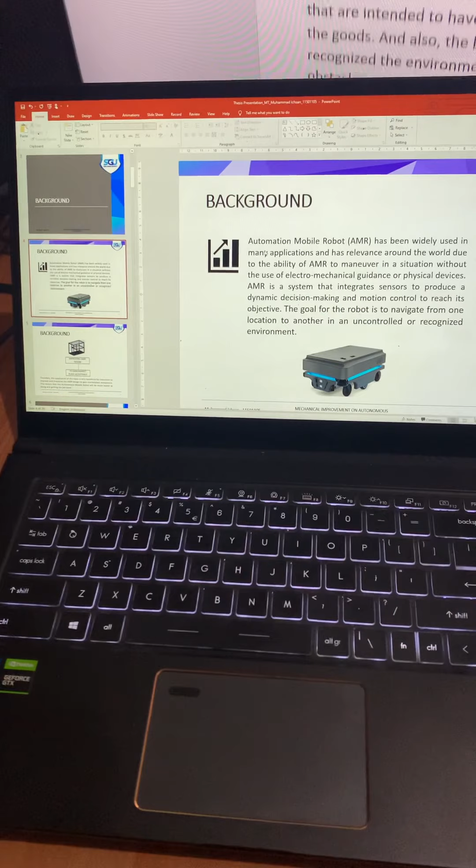So first, the background. As we already know, there's already AMR. So many AMR were made out there. Even there are some companies working on the making and the research about it.

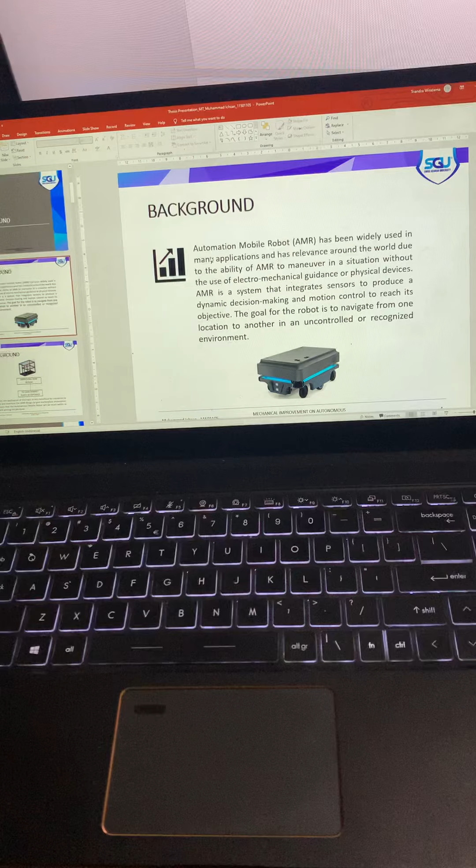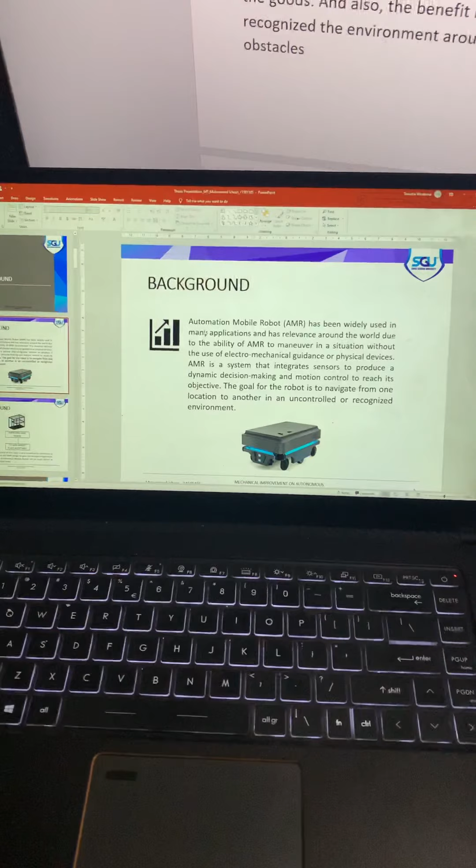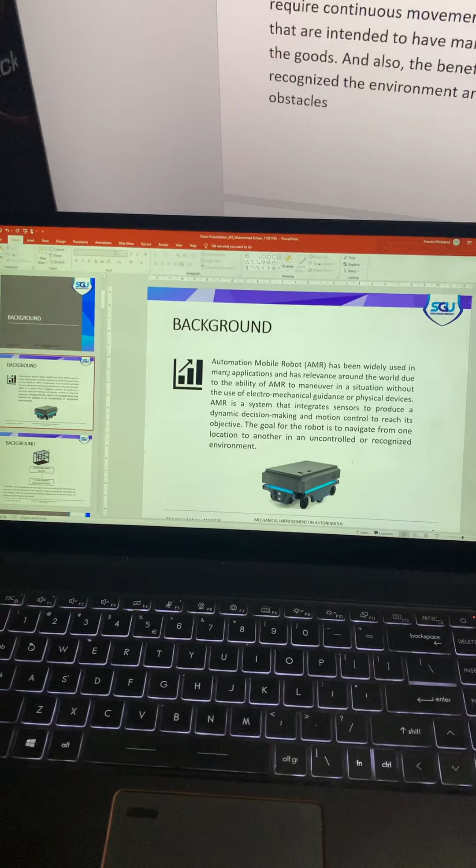The AMR robot itself was made with the aim of making it easier for jobs that require continuous movement of place, usually used in large warehouses that are intended to have many slots for placing goods and to move around the goods. Also, the benefit of this robot is it has sensors that can recognize the environment around the robot, and the robot itself can maneuver to avoid obstacles.

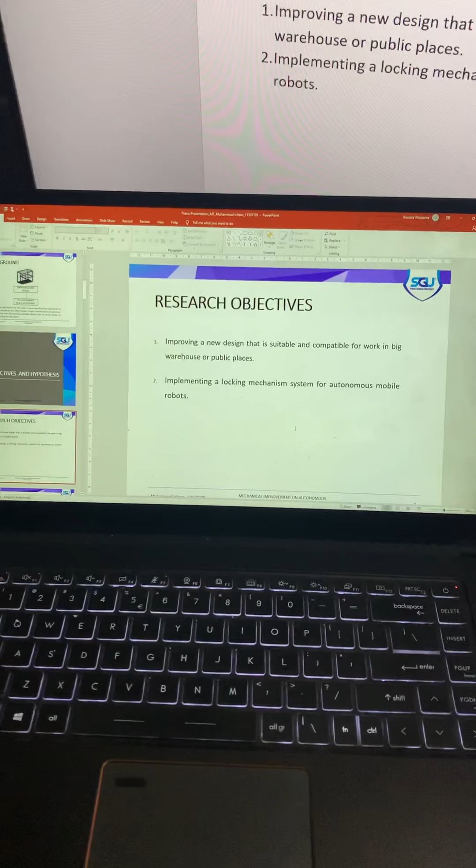The objective and the hypothesis. For this thesis, the objectives are: improving a new design that is suitable and compatible for work in a big warehouse or public place. Secondly, implementing the locking system for the autonomous mobile robot.

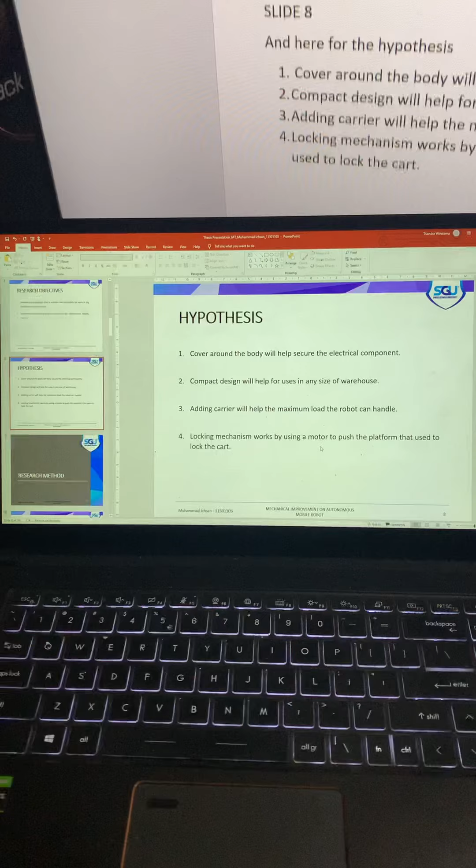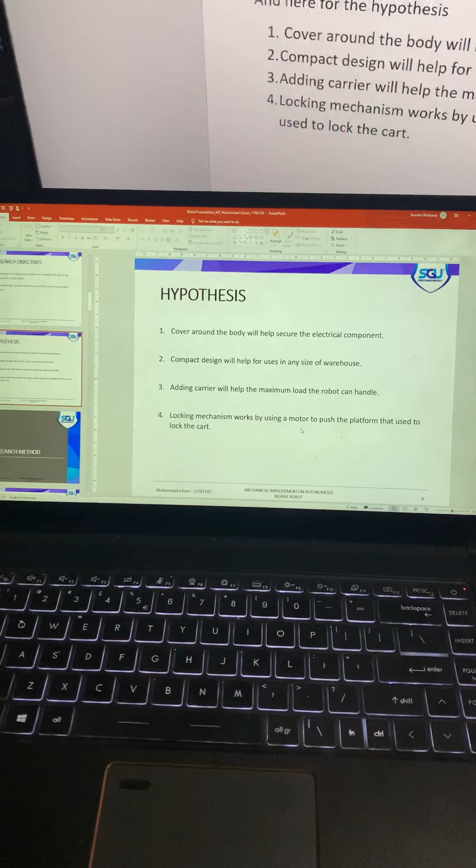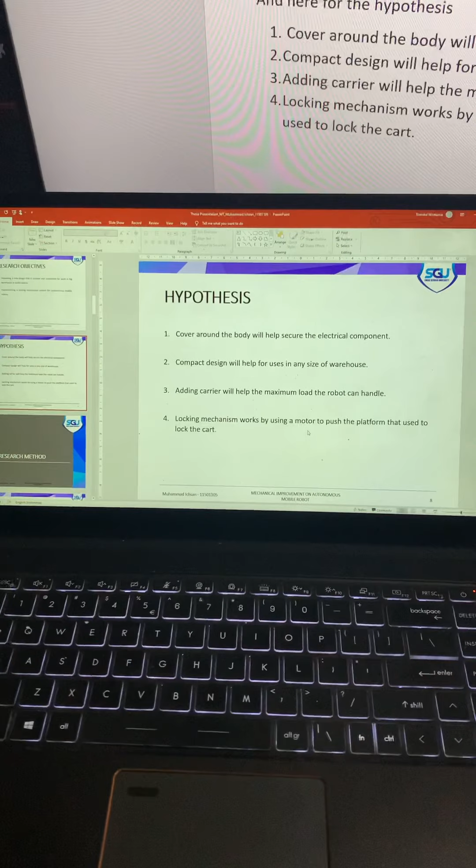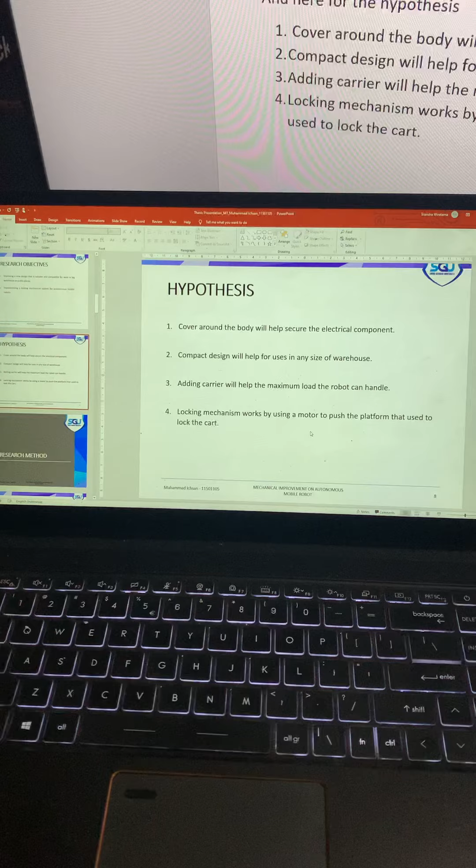The hypothesis of this work: first, the cover around the body of the robot will help secure the electrical components inside. Second, compact design will help for use in any size of warehouse. Third, adding a cart carrier will help the maximum load the robot can handle. Fourth, the locking mechanism works by using a motor to push the platform that is used to lock the cart.

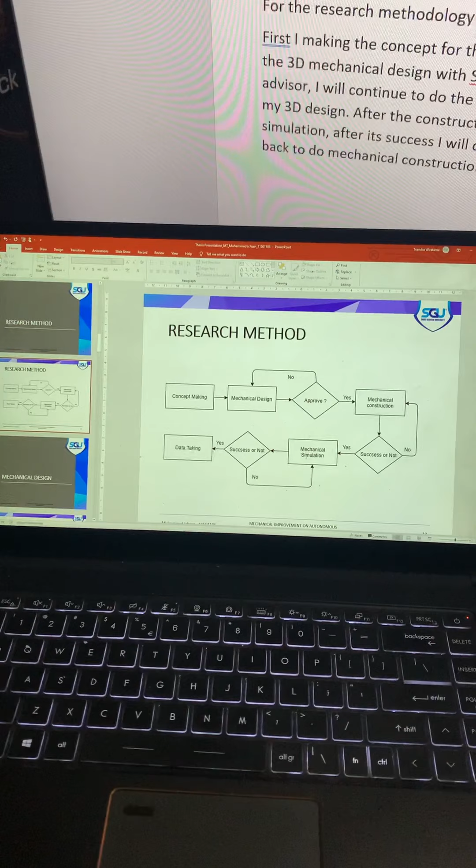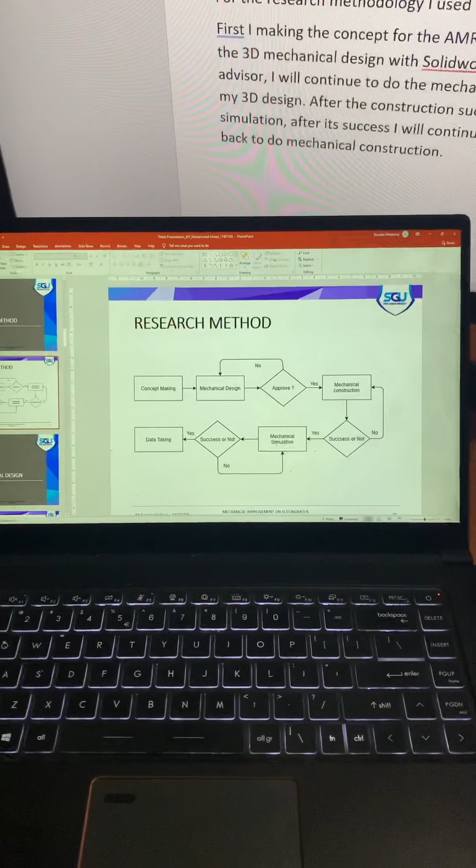Research method. So for the research methodology I use, the first thing to do is make the concept for the AMR design, choose the concept I want, then I will start designing the 3D design of the new AMR with SolidWorks.

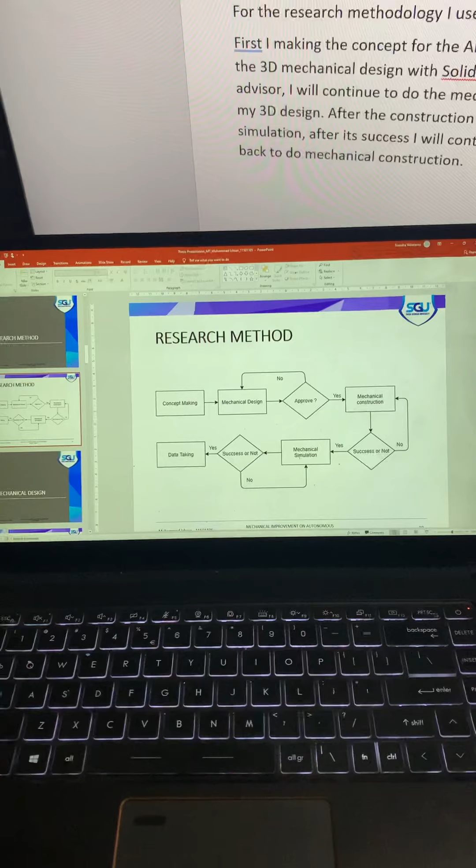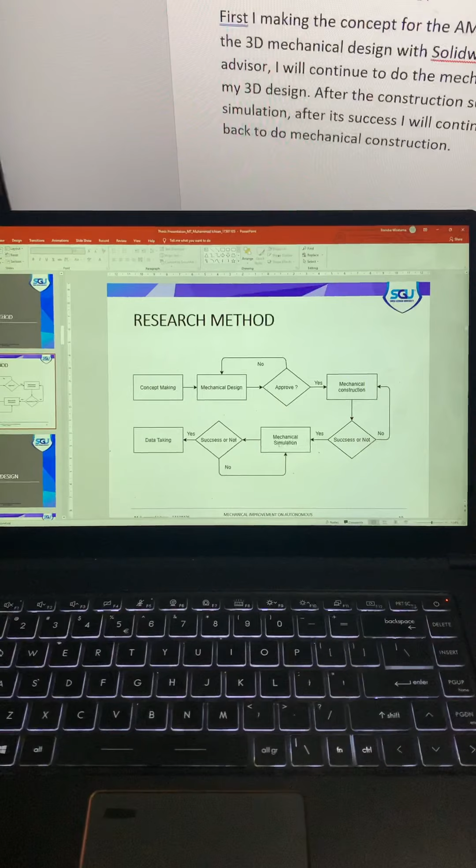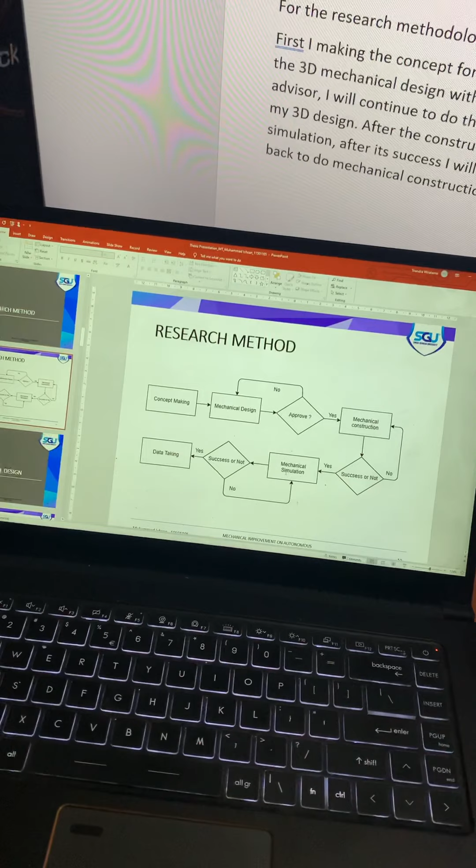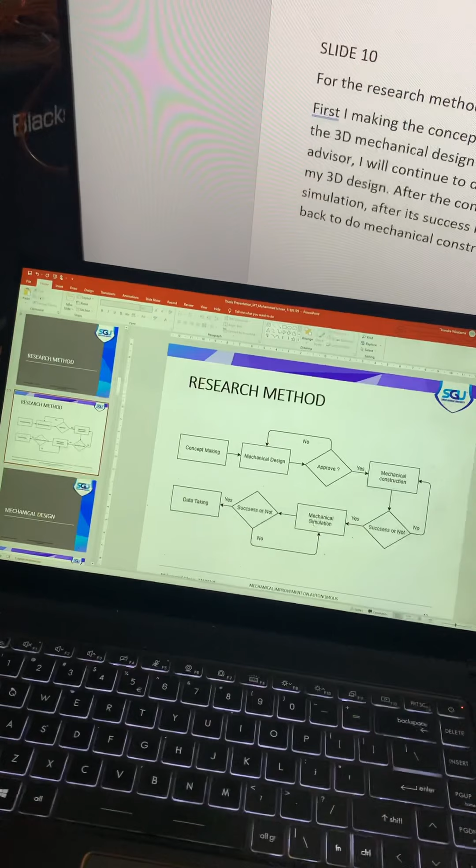Then after I get approved by my advisor, I will continue to do the mechanical construction. If it's not approved yet, I will revise the 3D design, and after the mechanical construction is successful, I will start to do the mechanical simulation. If there's still something wrong in the simulation, I will go back to the construction, and after it's all finished, I will start taking the data.

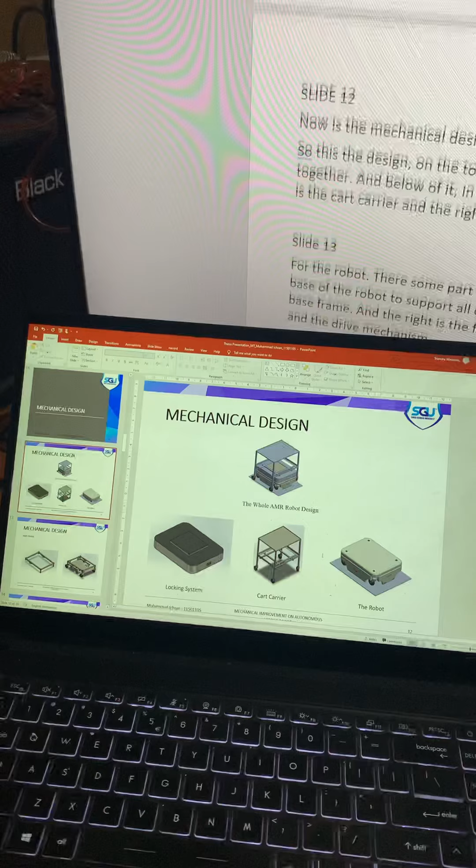So now is the mechanical design. The mechanical design that I already made by SolidWorks. So this is the design. As we can see, on top of the picture is the whole robot AMR design that I made.

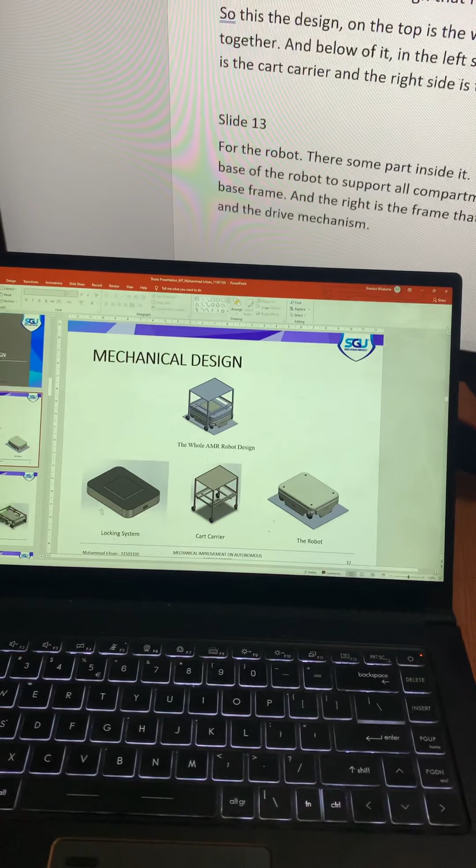The left side is the locking system that will be used for locking the cart carrier later, and in the middle is the cart carrier, and the right side is the AMR robot itself.

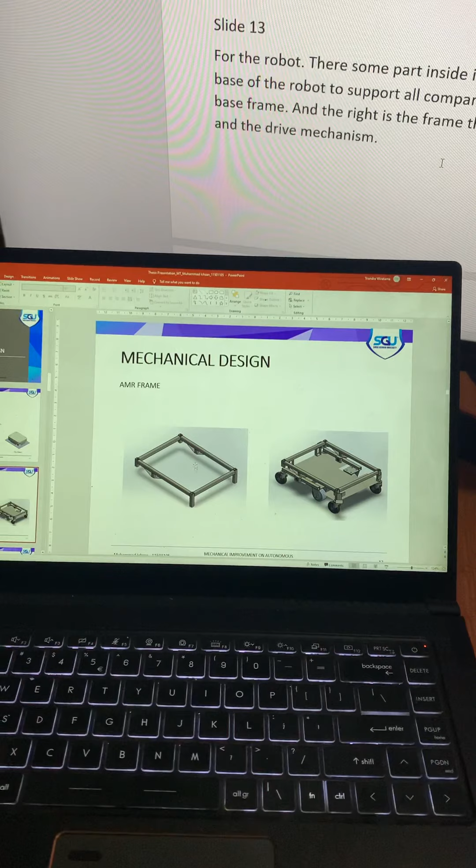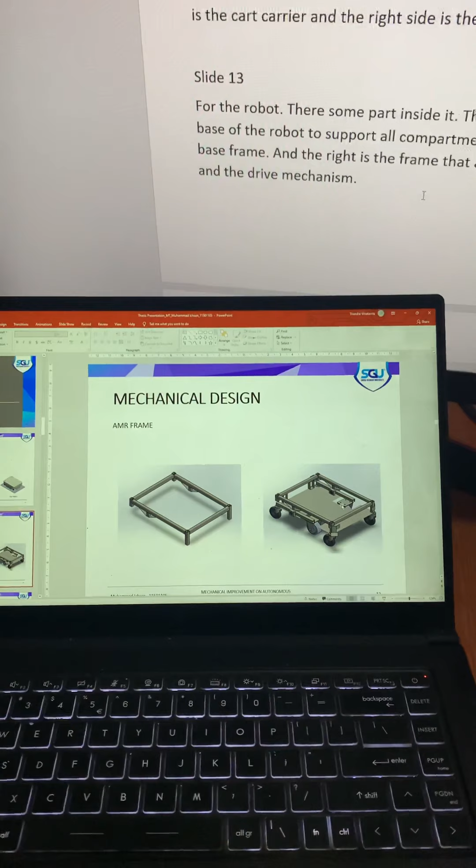For the robot itself, there are some parts inside of it. The robot has a frame. This frame is made as the base of the robot to support all the components later on. The left side is the base frame, and the right side is the frame with some of the drive mechanisms and other mounts already attached.

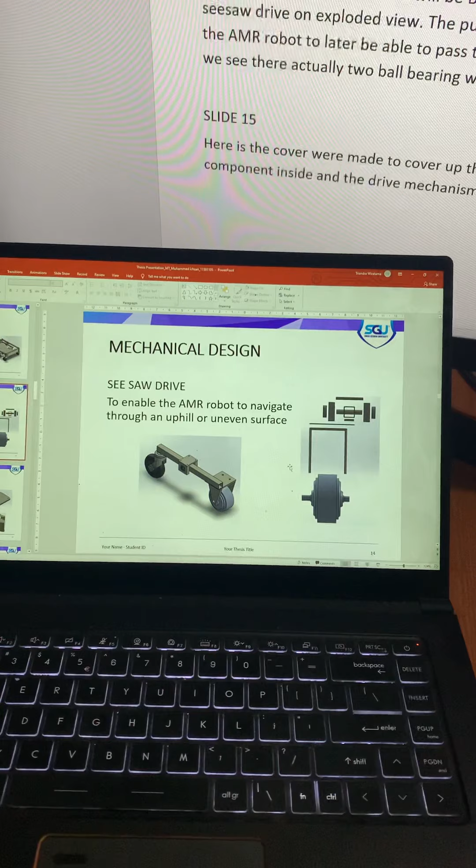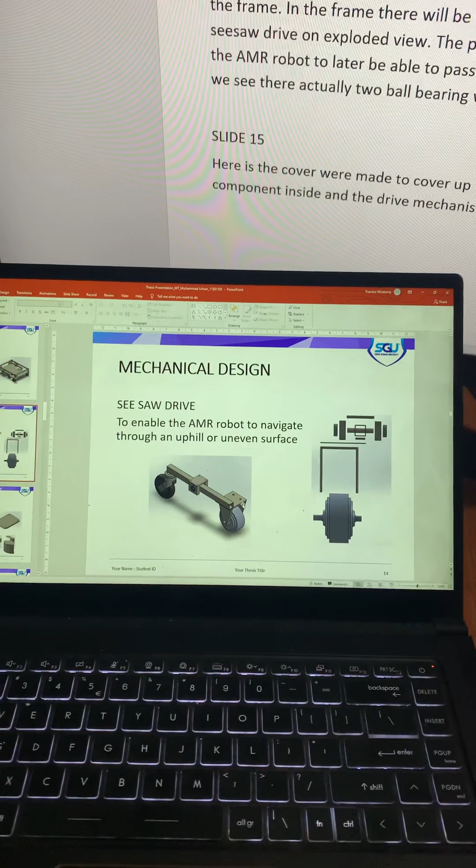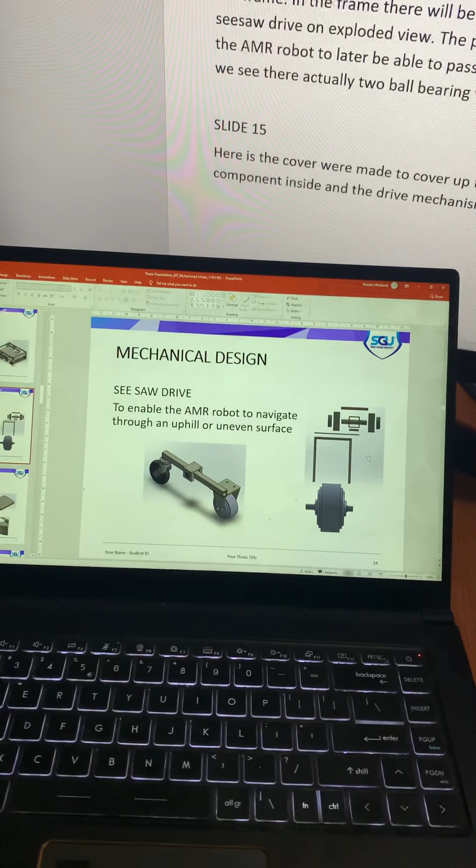Next is the seesaw drive, that will be used as the main base to support the frame. In the frame there will be a BLDC motor attached, as we can see here. This is the seesaw drive in exploded view. The purpose of this seesaw drive is to allow the AMR robot to later be able to pass through an uphill or bumpy surface. As we see, there are actually two ball bearings connected to the shaft.

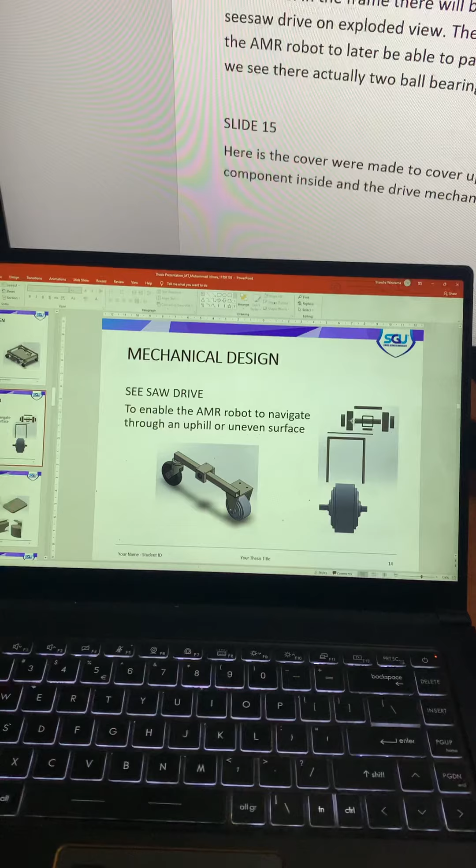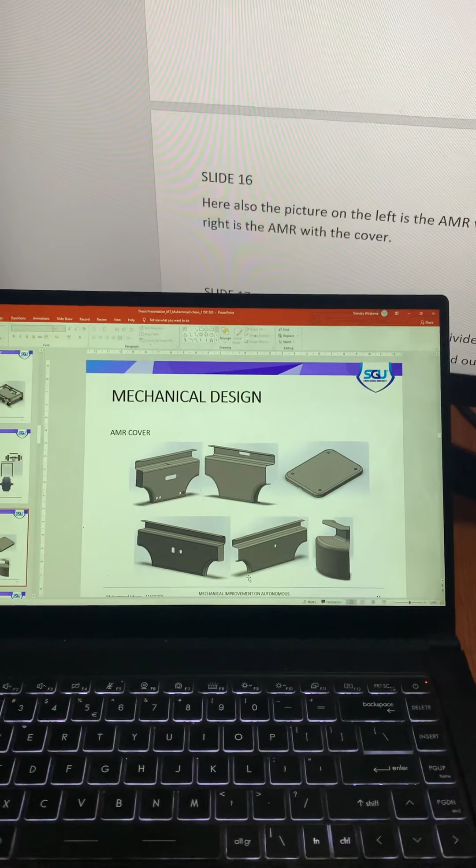Next, this is some of the cover of the robot that was made. The function of this cover is actually just to protect and cover the inside of the AMR robot, so the electrical components inside and the drive mechanism will always be protected.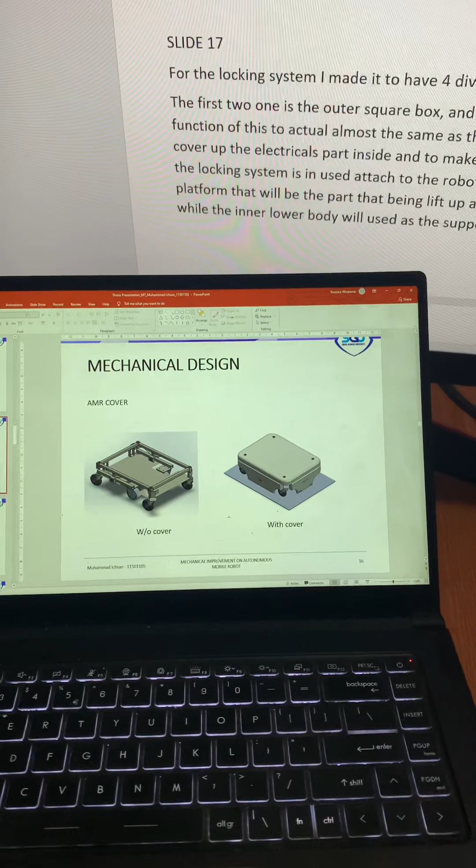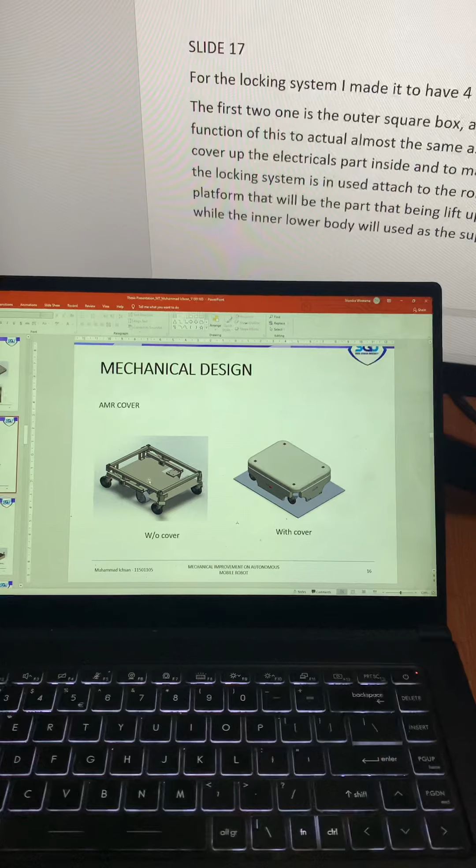So here, the left side is the AMR picture when all the covers are not included, and the right side is the AMR with cover.

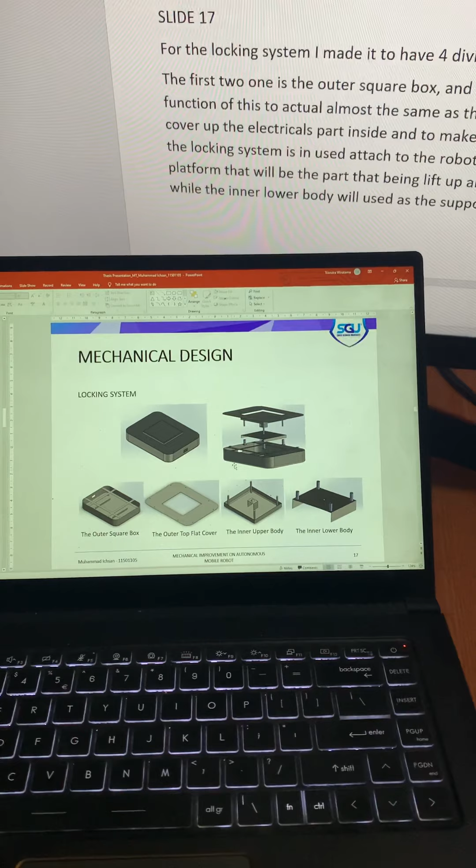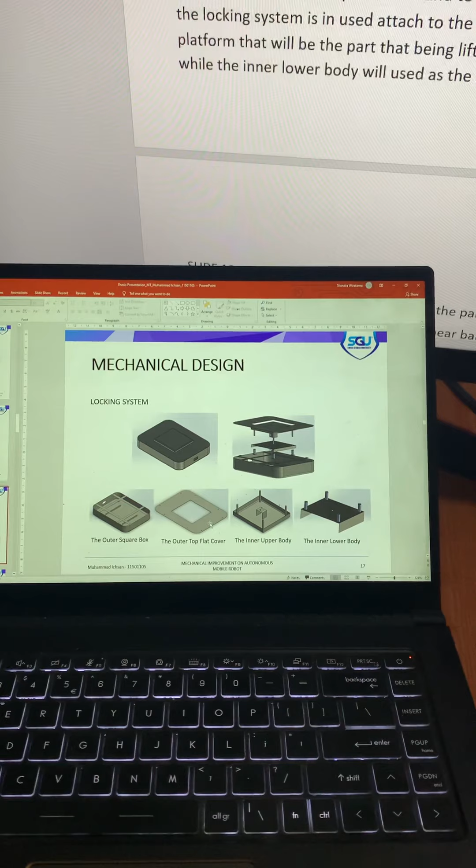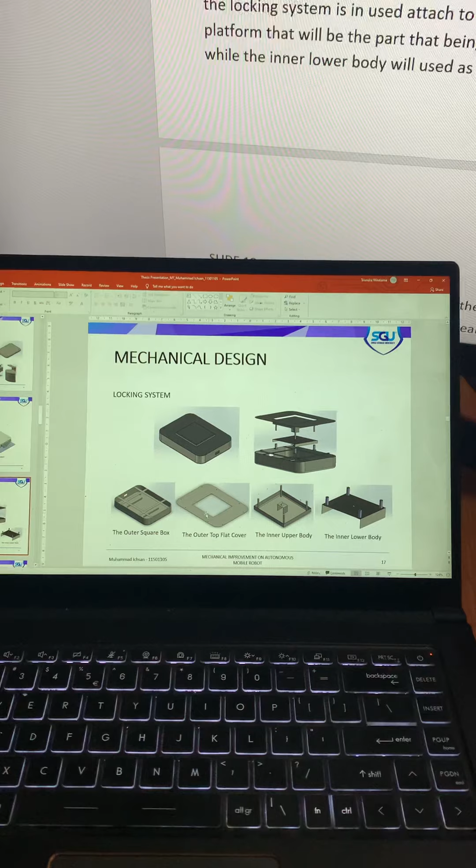And then for the locking system, I made this, the finished design, and here's the exploded view. Here I divided it into parts. The first one is the outer part, the outer square box, and the flat top cover. The function of these two is actually almost the same as the cover on the AMR robot, to cover up the inside part like the electrical part inside, and to make it as clean as possible when the locking system is used to attach to the robot.

Here is the inner upper body, the inside of the square box. The inner upper body is the platform that will be lifted up and down by the stepper motor, which will attach here, while the inner lower body will serve as the support for the inner upper body.

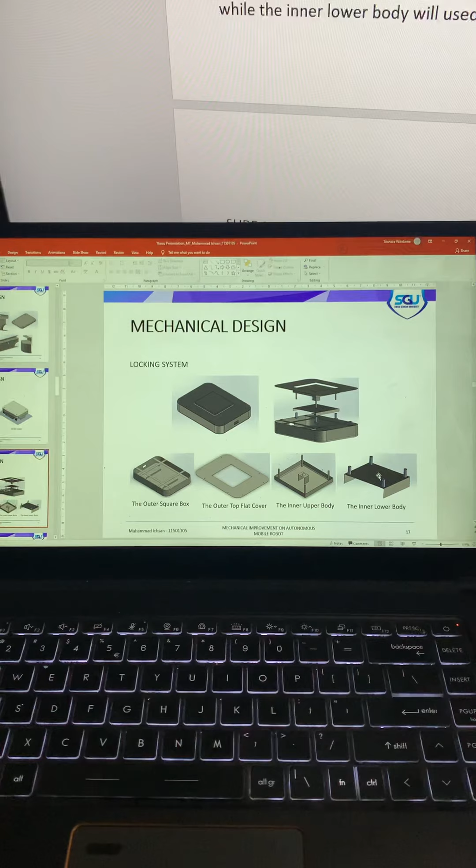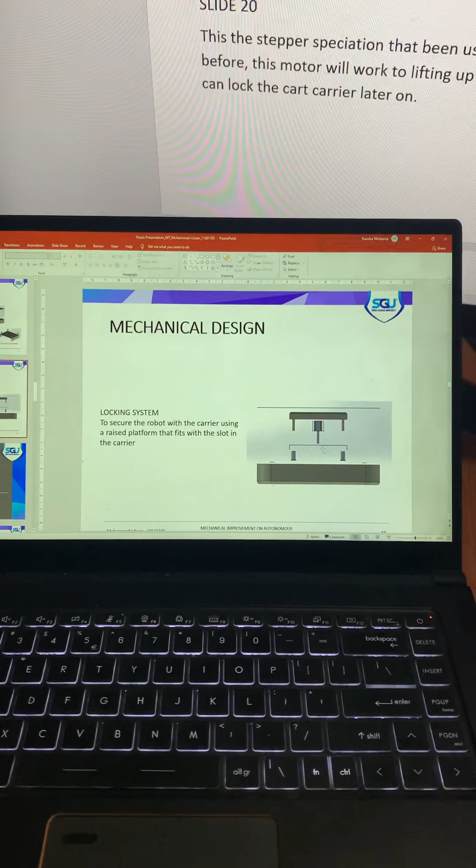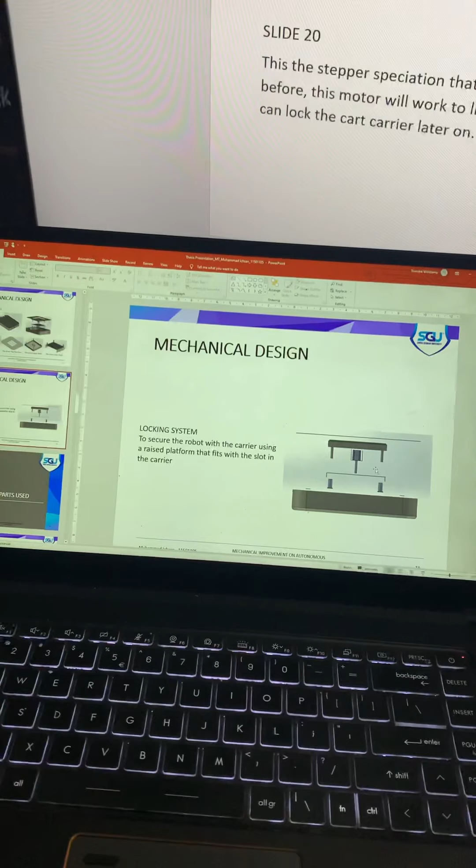Here is the view of the arrangement of all the parts combined together. In the inner lower body, I put 4 pieces of LMK linear bearings to support the shaft on the inner upper body.

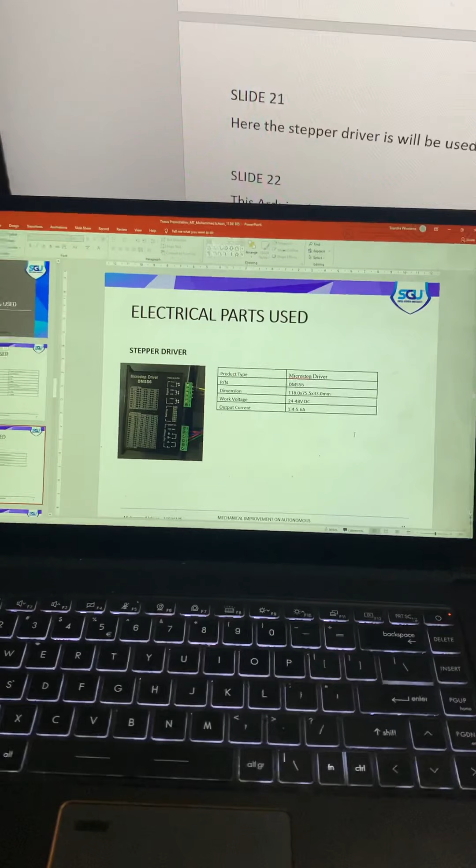Here the stepper driver will be used to control the stepper motor. Next, here is the microcontroller. I use an Arduino to later on control the stepper motor. This Arduino is a microcontroller used to make the code so the stepper motor can work properly as needed.

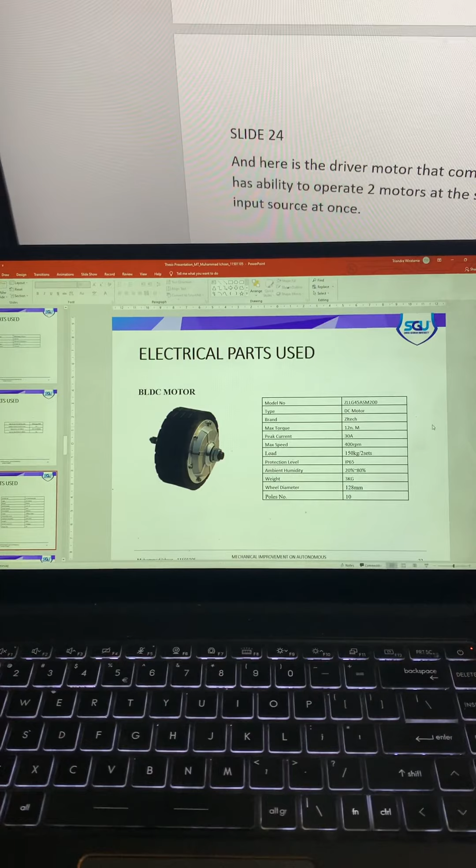Next electrical part is the BLDC motor, used to drive the AMR robot. This motor was chosen because it is available on campus right now, and has the ability to run at lower speed with greater torque than other available motors. This motor also comes with a driver and demo software that is easy to operate.

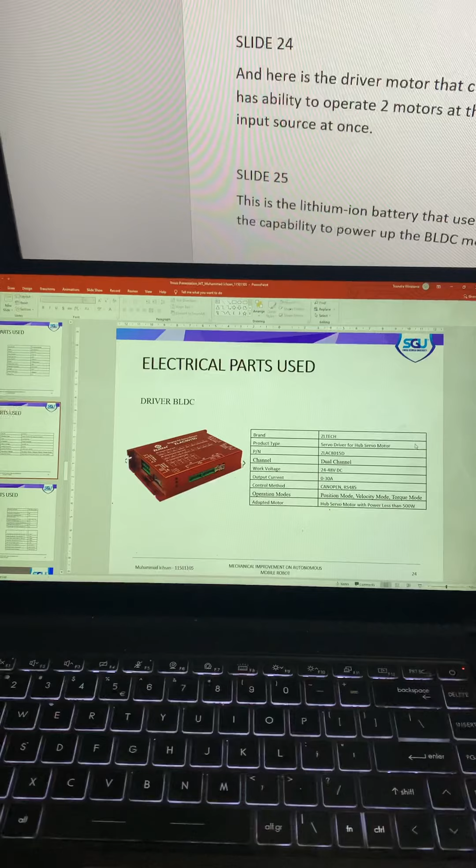And here's the driver motor, which comes with the BLDC motor itself. This driver actually has the ability to operate two motors at the same time, and also can give two input sources at once.

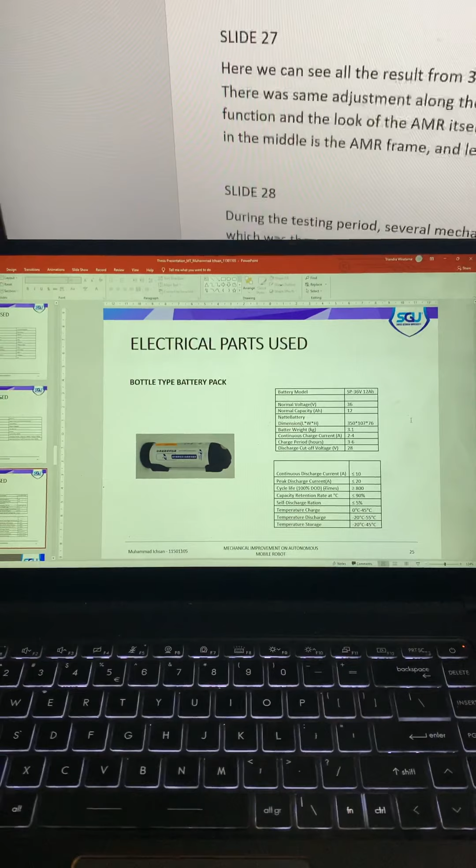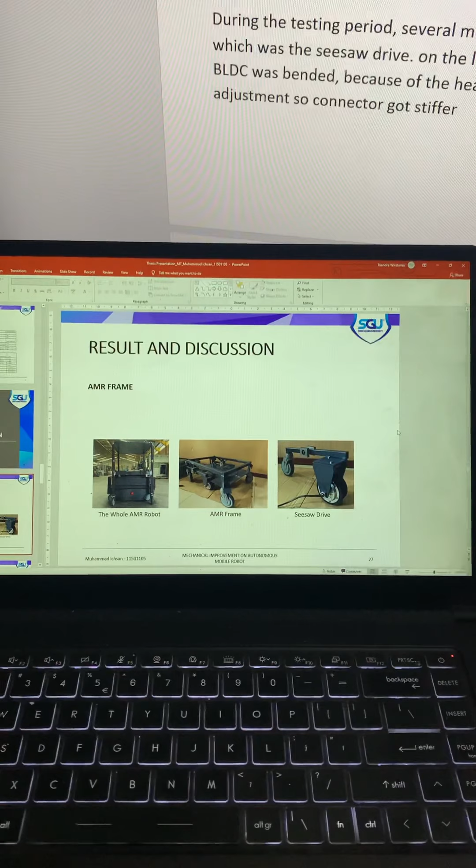In the results and discussion, here we can see all the results from the 3D design that has already been fabricated. There was some adjustment along the process, but it didn't change the function or the look of the AMR itself.

The left side is the whole AMR robot, as you can see here. The middle is the AMR frame, and the right side is the seesaw drive.

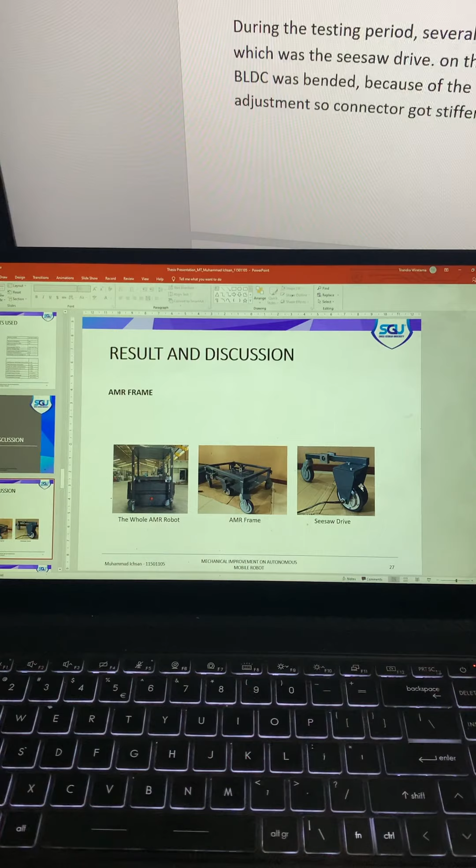During the testing period, several mechanism problems occurred. One of which was the seesaw drive. On the left photo, the connector mount for the BLDC was bent because of the weight of the motor, so I made some adjustments so the connector got stiffer, and now it's fixed.

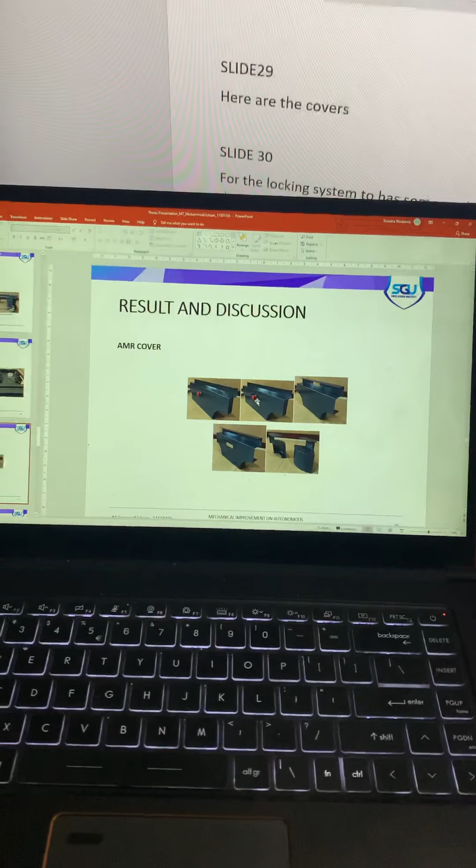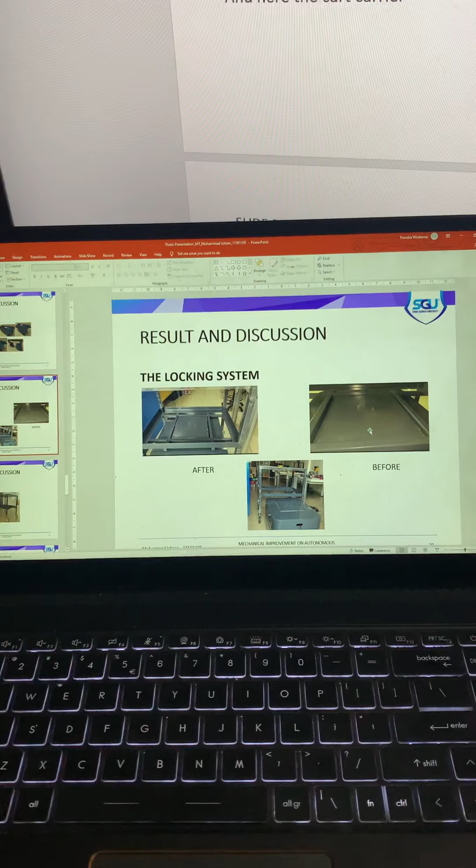Here are the covers. Then for the locking system, there was the same problem with the fitting adjustment dimension, but after the inner upper body was cut, it reduced the dimension. Now the locking works properly.

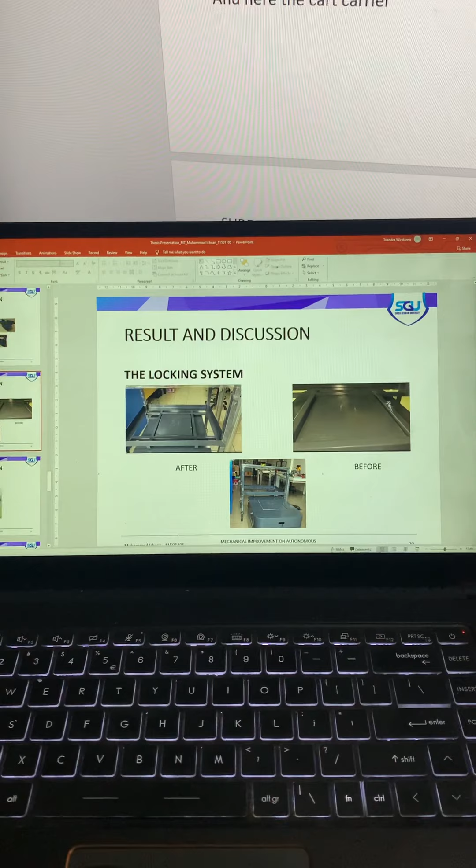This is before - there's no gap in here, and now it's working properly. Here is the cart carrier.

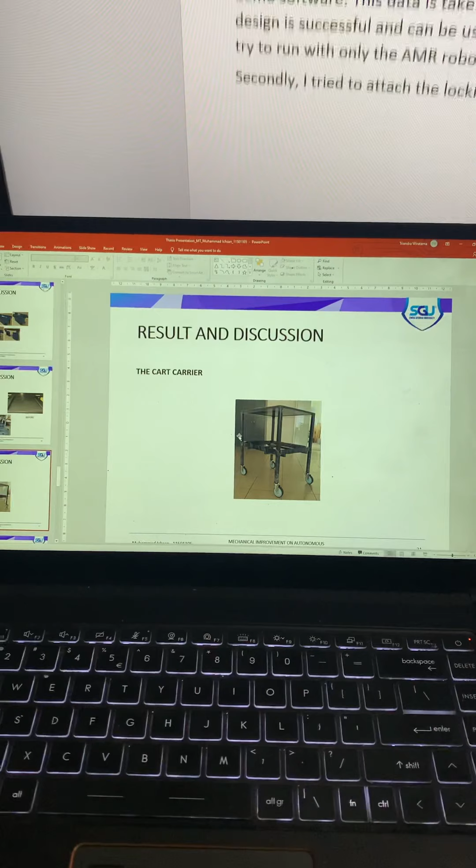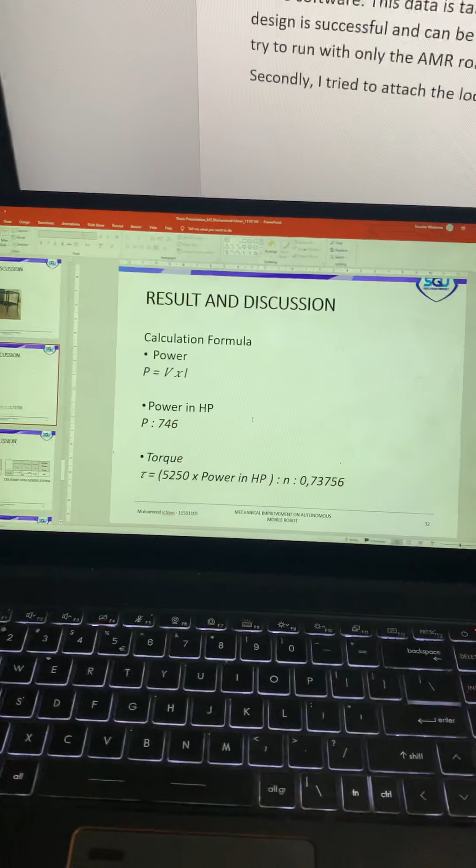Now here's some of the formulas for calculating the data taken later, at the moment of defining the torque average. So here's the data.

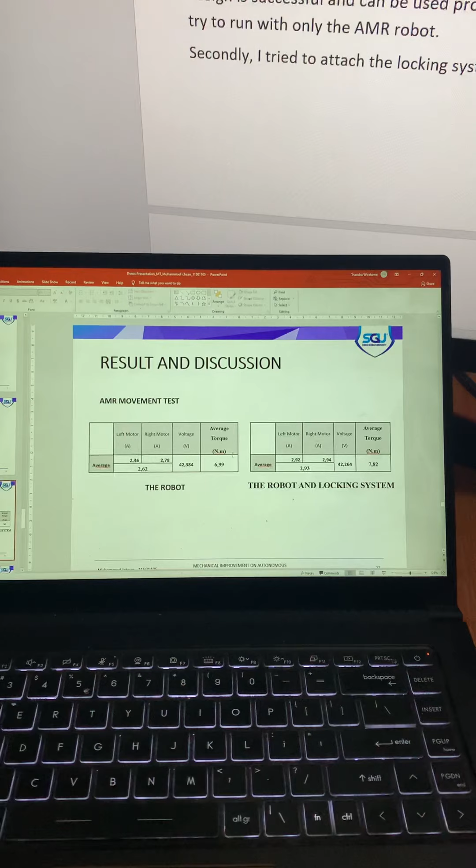Here's some of the data taken from the BLDC using the company's default demo software. This data is taken so we know whether the mechanical design tool is successful and can be used properly with the motor. The first test I tried was running with only the AMR robot.

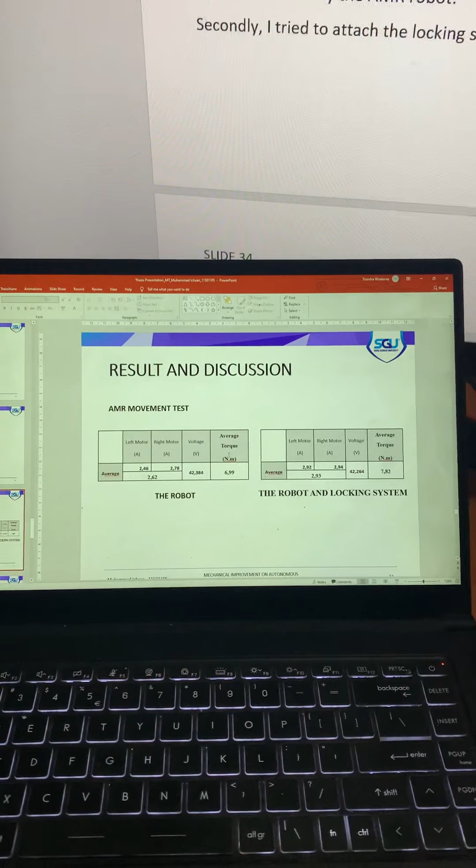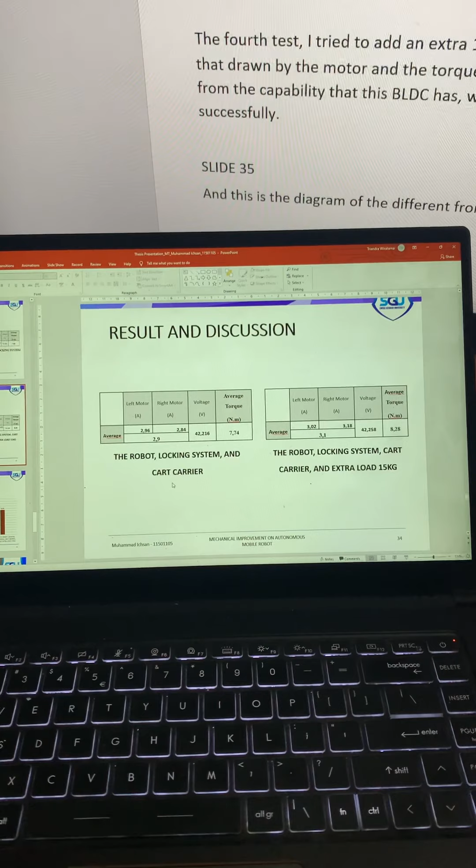Secondly, I use the locking system, the robot and locking system together. The third test I did with the cart carrier attached, and the fourth test I put some extra load in there.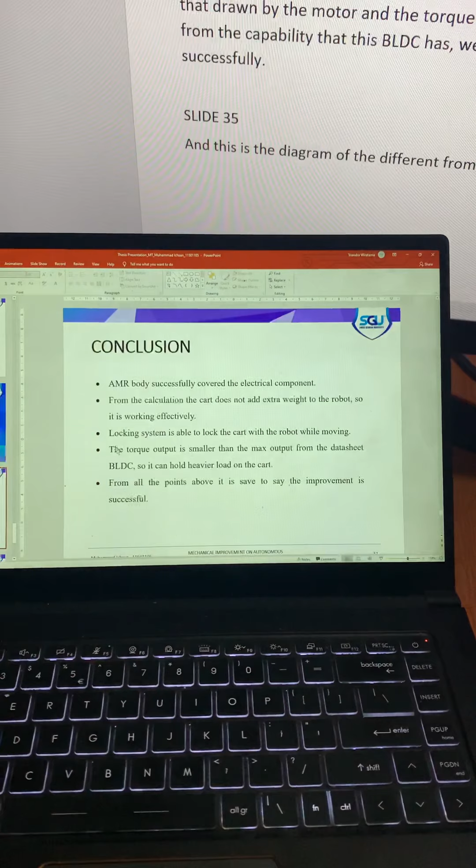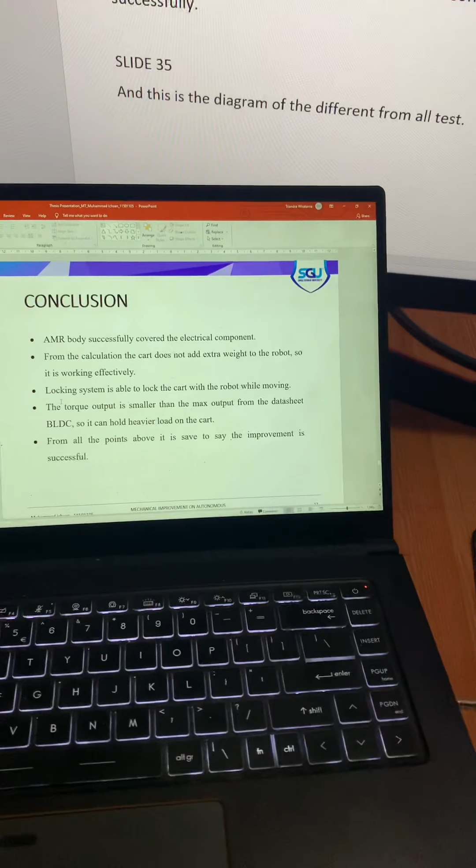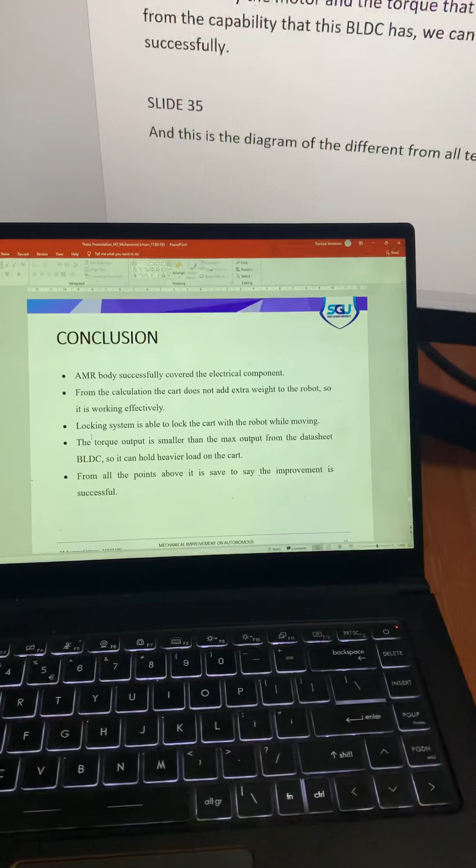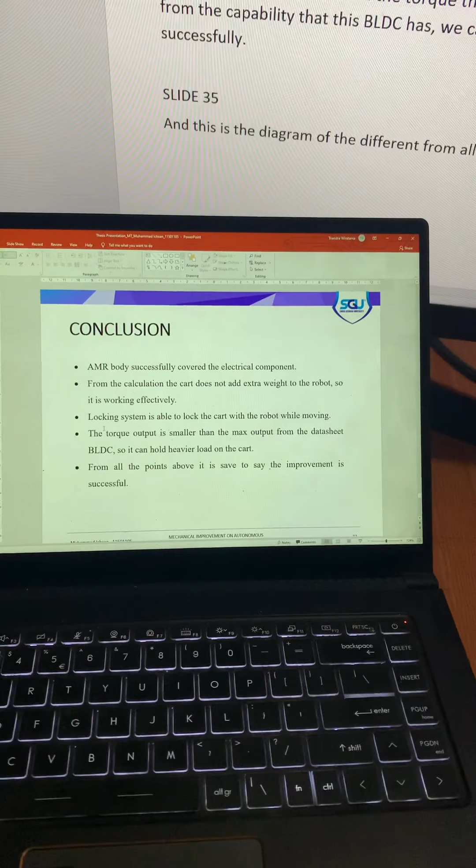So we come to the conclusion. The AMR body successfully covered the electrical components. From the calculation, the cart does not add extra weight to the robot, so it's working efficiently. The locking system is able to lock the cart with the robot while moving. The torque output is smaller than the max output from the BLDC datasheet, so it can hold a heavier load on the cart. From all these points, it's safe to say the improvement was successfully done.

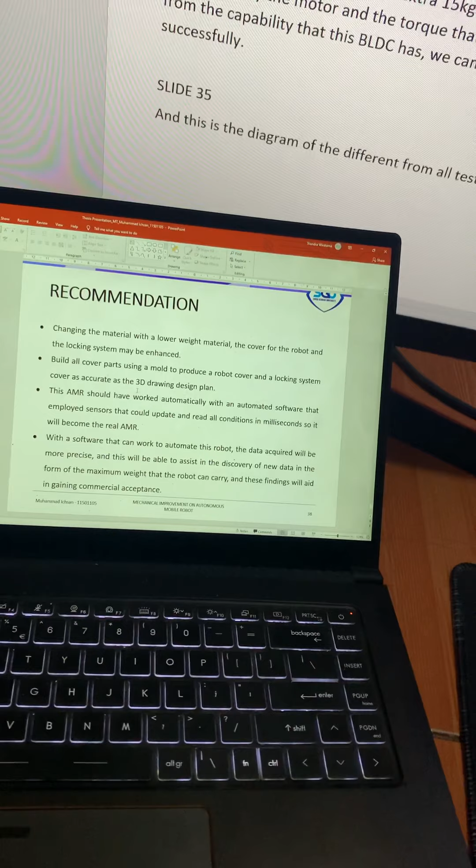My recommendations: first, change the material to a lower weight material, so the cover for the robot and locking system may be enhanced. Build all the cover parts using a mold to produce the robot cover and locking system cover, as accurate as the 3D drawing design plan.

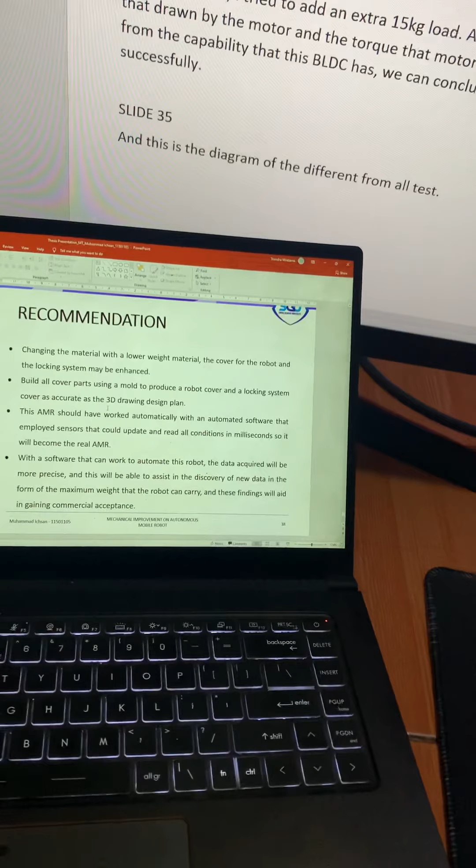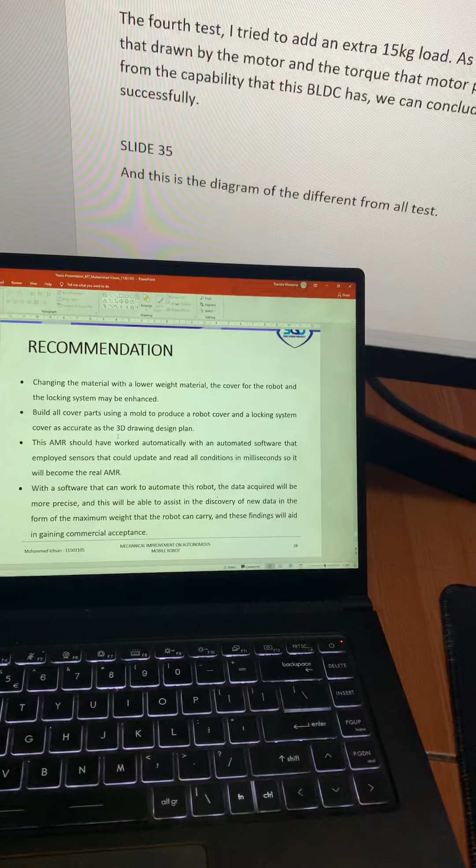This AMR should work automatically with automated software that employs sensors that could update and read all the conditions in milliseconds, so it will be a real AMR and can work properly.

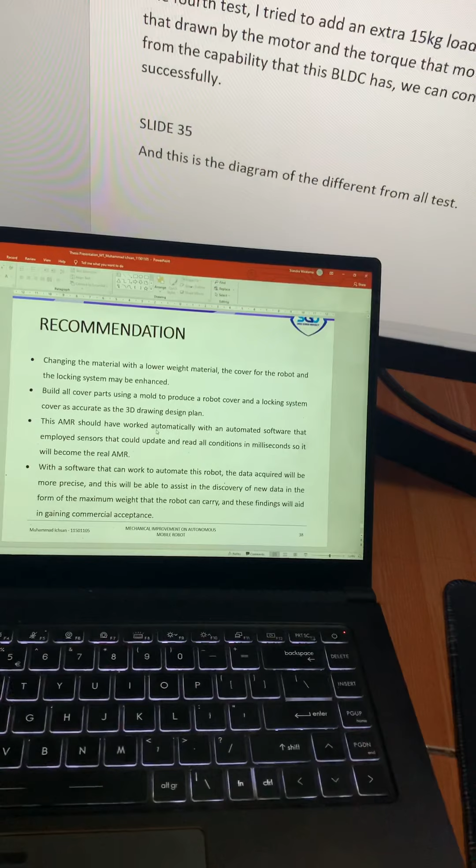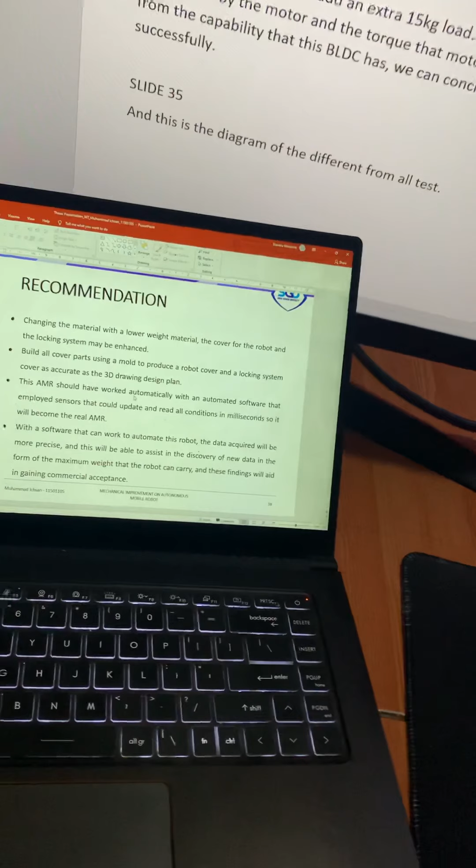And lastly, with software that can automate this robot, the data acquired will be more precise, and this will assist in discovering new data on the maximum weight the robot can carry. This finding will aid gaining commercial acceptance.